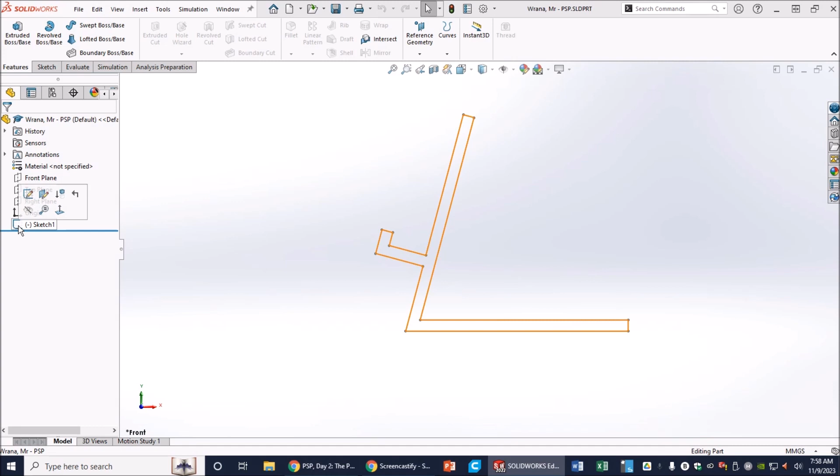Let's go ahead and open our sketch first, and go to Edit Sketch. Looks good, all my measurements are correct, everything looks fine. I'm going to go to my Features tab now and hit Extruded Boss Base.

The first section of this tab, all these boss bases, is adding material. All this other stuff is removing material. Obviously we can't remove material if we haven't added anything yet, and even then we've only got 3 choices instead of 5. Over here, we're manipulating material once it's actually out there, and the last few sections are just some extra stuff.

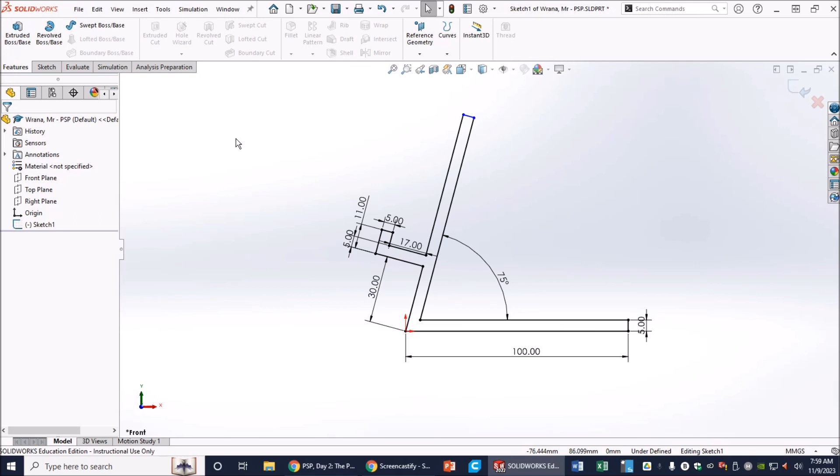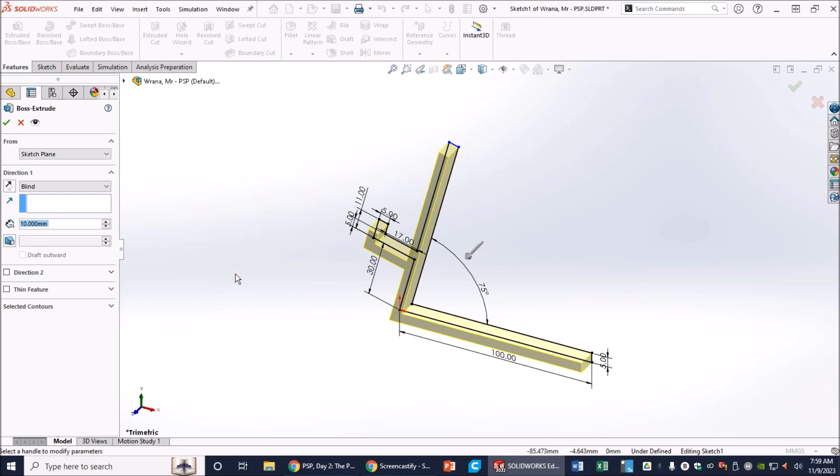I'm going to go ahead and go to Extruded Boss Base, which is just a straight shoot out there. Normally it starts off with blind - don't know why it went to mid-plane, I guess because I was messing with it earlier. So this is what you'd typically have: a blind direction coming straight out towards you, and typically it's going to be at 10 millimeters. Now I'm going to move that to 45 millimeters.

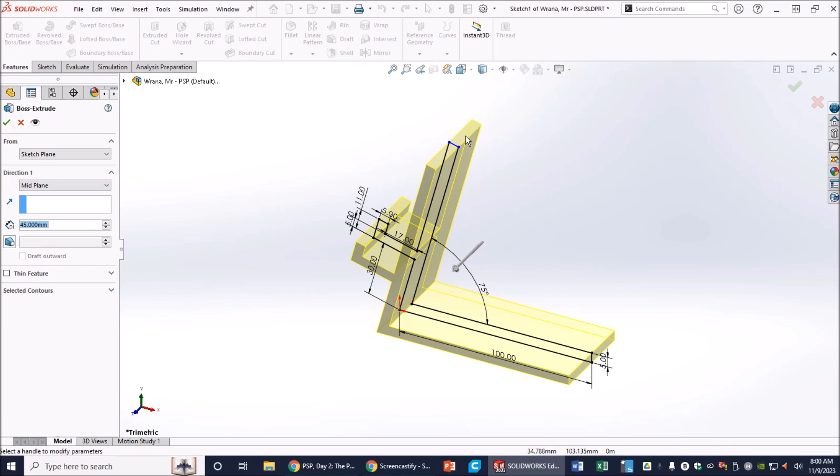And there's the stand right there. Now I could go ahead and do a whole lot of different things, close this, and start working, but then I'd have to deal with trying to come up with a cut. I'm going to make my life easier by going to mid-plane, so I'll put my sketch right in the middle of the extrusion. Once I'm done, I click the green button - that's all there is to it. And that is the full extrusion right there.

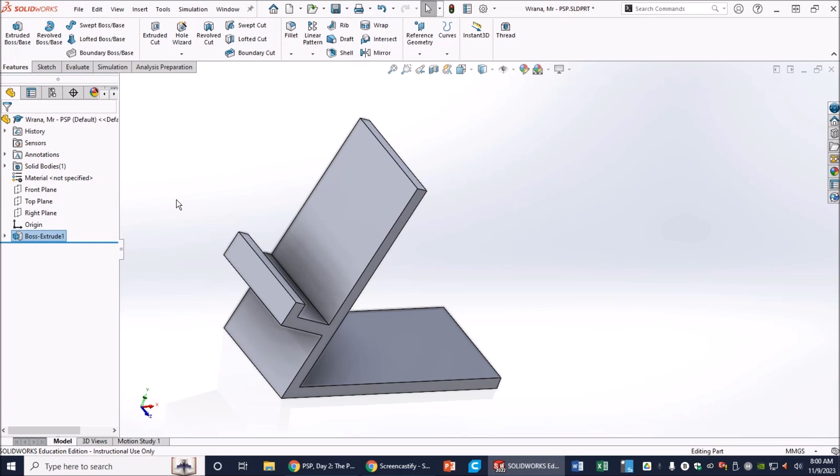Pretty cool, huh? Okay, so now what I need to do is think about the cut. This is the part - if you don't want to add this to your shelf, go ahead and fast forward. I'd also recommend that you pause and start the video over as you go through this.

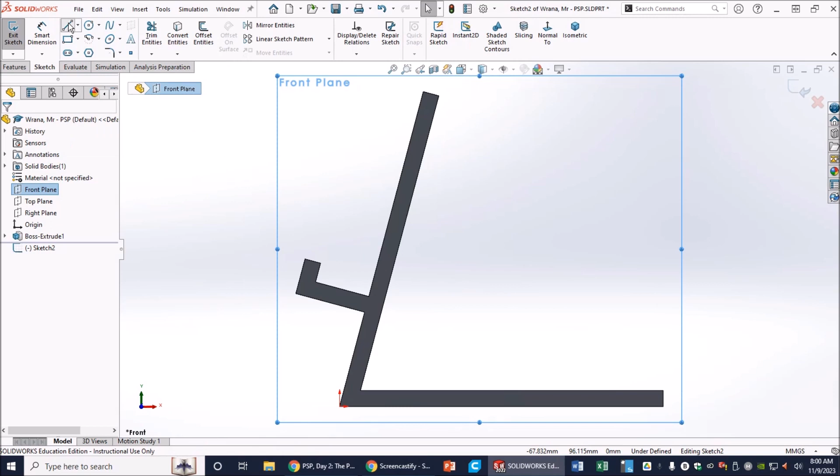I'm going to go ahead and choose the front plane, open a sketch because I need to come up with a sketch. Click normal - I had to add that button, yours probably will go normal anyway. There's a couple of different things I can do: I can use reference geometry to pull the lines out, or I can just use a simple sketch. I'm going to go ahead and do that. I'll zoom in on the shelf - I want to outline the entire shelf.

Now I'm going to come up here and do the same thing. Okay, I'm going to go ahead and select - doesn't look like it's there, but it is, you can see the black lines there. I'm going to go to Features.

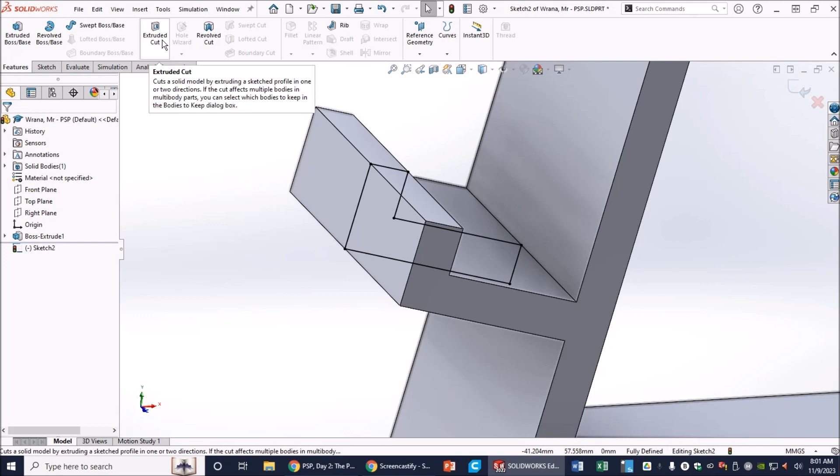I'm going to go to Extruded Cut. And there is the cut. Now that's a little bit too much - you're like, wow, that's a lot, sir.

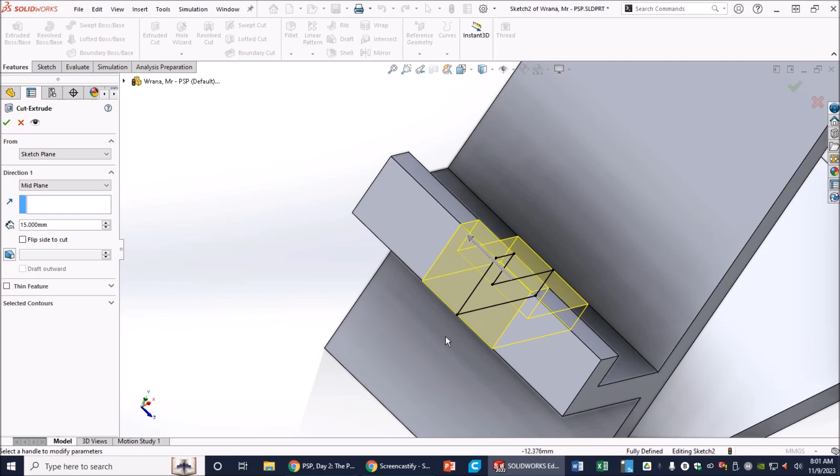Okay, well I want 15 millimeters. I'm thinking, well why 15? Well, 45 divided by 3 is 15, and you can see that it's right there in the middle. Yeah, that's pretty cool - I'm doing a mid-plane direction 1 cut at 15 millimeters wide, and it has now cut it out for me. Look at that again: mid-plane, 15 millimeters, and there's your cut.

There it is. Okay, now let's click the save button real quick just to make sure I've got everything. Now, lots of angles, lots of sharp corners.

Let's go ahead and do some cleanup here. We have a few buttons up here that we can mess with in the Features tab. One of them is called Fillet, and as you can see, the fillet is a rounded corner. So I'm going to go ahead and click Fillet.

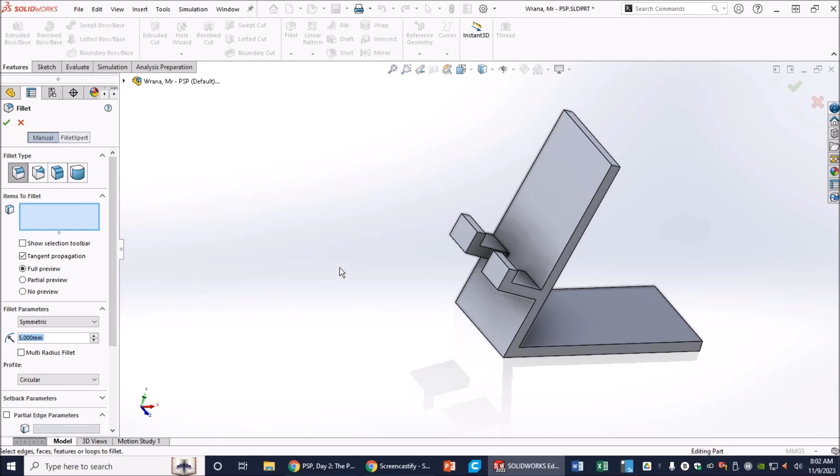I'm going to go ahead and go to 5 millimeters. Why 5? I don't know, it's something kind of random. I'm going to get these major corners, this one here. I'm going to make sure I got a full preview so I can see what's going on.

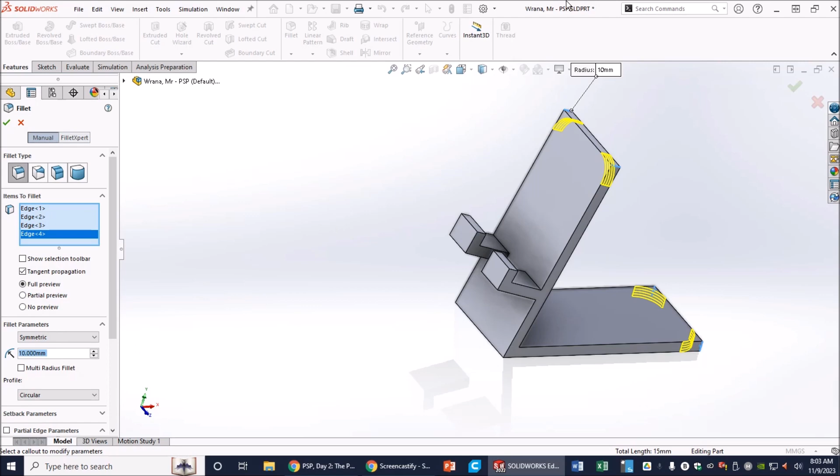There we go, and yeah, you can do it from that side. It's a little small, so I'm going to bump it back up to 10 millimeters. That's much better. Okay, so that's my 10 millimeter fillet.

I'm going to try it right here just to see if it'll do it. Yeah, I don't want to do that. Clear, delete, there. Okay, once I do that...

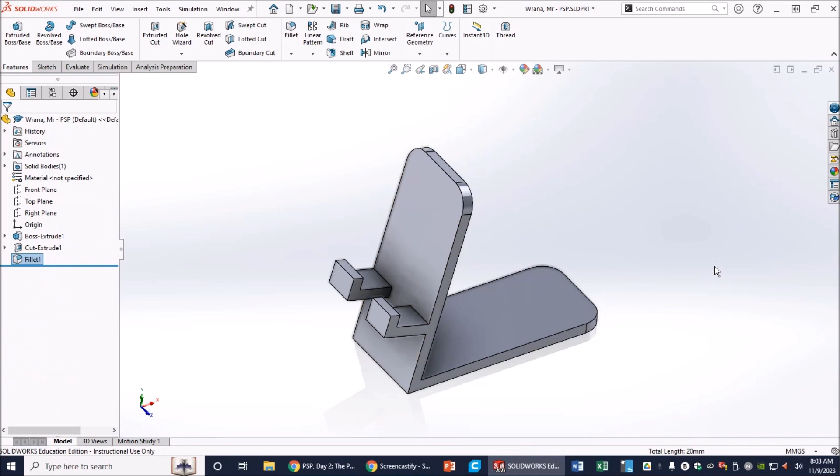Green check. Okay, so I'm going to go back to fillet, and this time I'm going to go 5 for sure. And what I'm going to do is come over here. Let's see if that looks okay. Yeah, that looks okay.

If I don't like the look, I can go ahead and clear it, or I can just maybe change the radius. That's better. I like 3. That'll work.

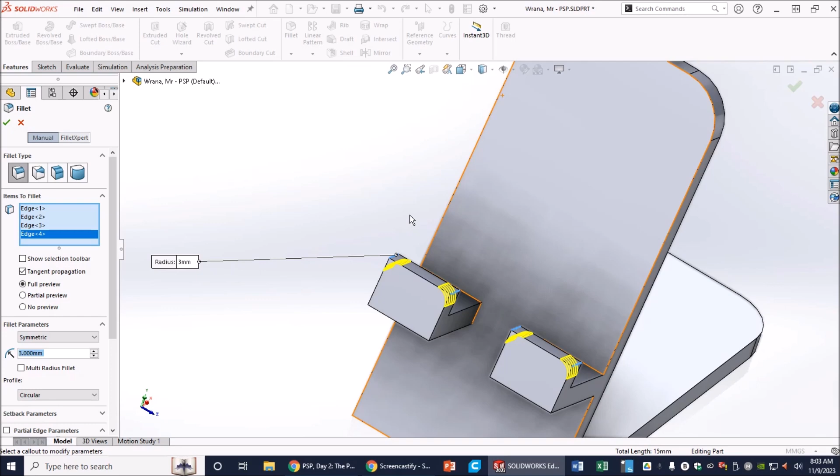Okay, so that's 3 millimeters. And then why'd you select 3? I just liked it better than 5.

Okay, and I'm going to do one more at 1 millimeter. I'm going to zoom way out and select the whole thing. This will take a minute.

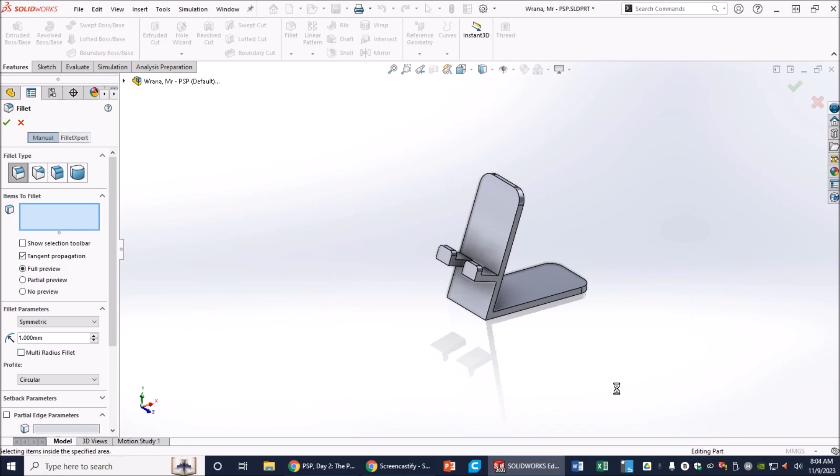Just finding all the different edges. And these, see we have all, since I'm on full preview, I've got all these yellow lines. We are good. Click. And that's it.

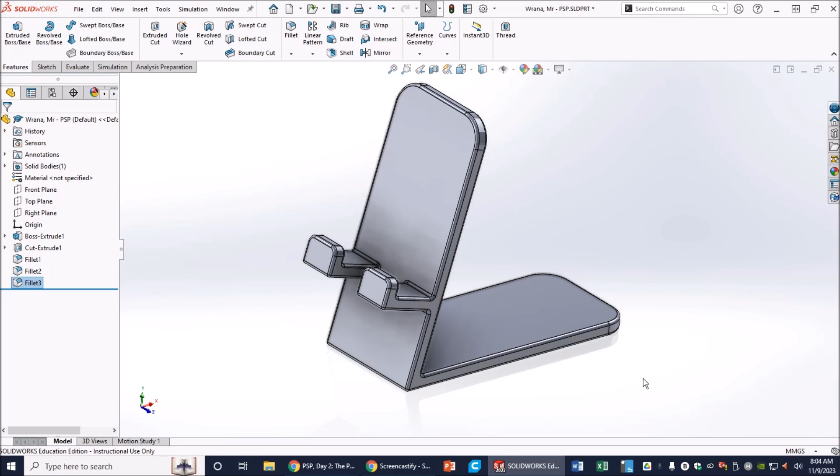That is the finished phone stand project. Again, you don't have to do this cut right here, but you do need to do some of the fillets.

Okay, what I'm going to do is I'm going to go ahead and save this. Haven't really talked too much about file types. This is called an SLDPRT file. If I go to File and Save As, you will see that. SLD PRT, SolidWorks Parts File.

Now what this allows me to do, I've got it in a thumb drive right now. What this allows me to do is I can go in here and edit this thing anytime I want, make changes, do whatever I want to do.

The file that I want you to send me is called STL. You're thinking, well, how do I make an STL file? I'm glad you asked that question. You're going to use the same file name, which is right here.

You're going to drop down here where it says Save as File Type, and you're going to click. They are in alphabetical order. You come down here, and that's the one I want. STL is a finished file type.

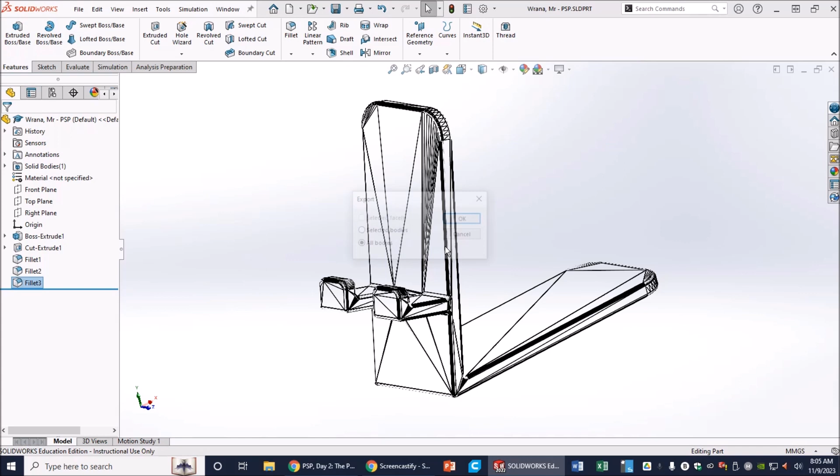Save it to the same location as my main file, and it does that. Yes. And then sometimes it gives you the OK. You need to do the OK as well.

All right, now let me show you what that looks like. Okay, let me see here. That's going to be over here. This is the STL file. Completely different icon, different file type.

Now, if I lose my SLDPRT file, people think, oh, I can just take the STL, load it, and then manipulate that. Nope, can't do that.

Okay, let's go ahead and open with 3D Viewer. Pull my 3D Viewer over here. And by the way, you have these files, you have these apps as well, so just do what I just did.

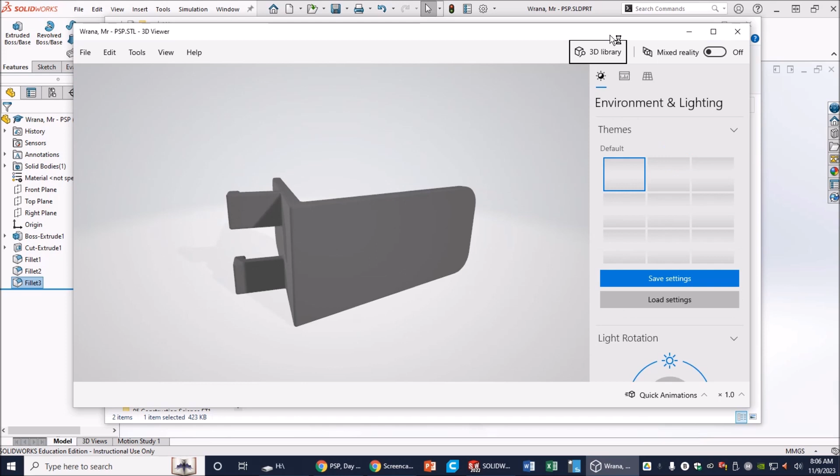And there it is. That is the completed phone stand.